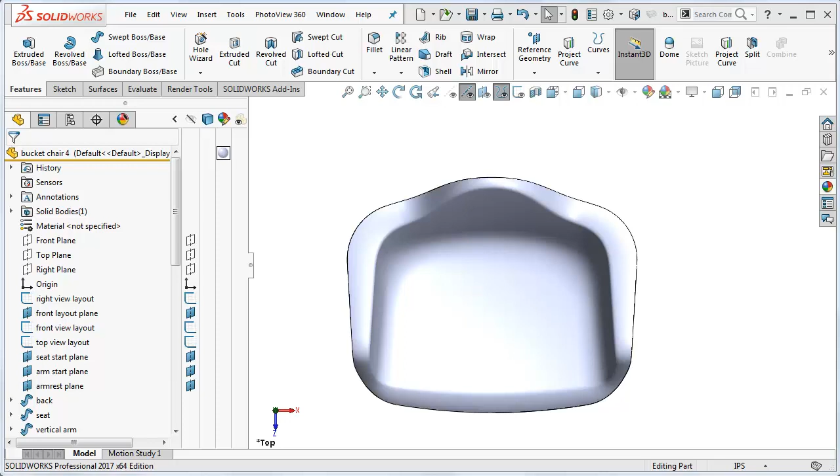This is a relatively quick video to show how to build bucket-style chairs. I've used the Eames Armchair as an example, but this can be used for a variety of similar chairs, such as the Noomi Chair, the Barclay Chair, and the Striad Chair. The techniques shown in this video probably won't work well for something like the egg chair.

These techniques work best for chairs that have well-defined surfaces blended together with fillets or boundaries. For example, although everything is nicely blended together, the seat pan, the arm area, and the back are all distinctive areas that are easily identifiable. This is in contrast to the egg chair, where it's hard to tell where the armrest and the back or the seat begin or end, because they flow together as one single form.

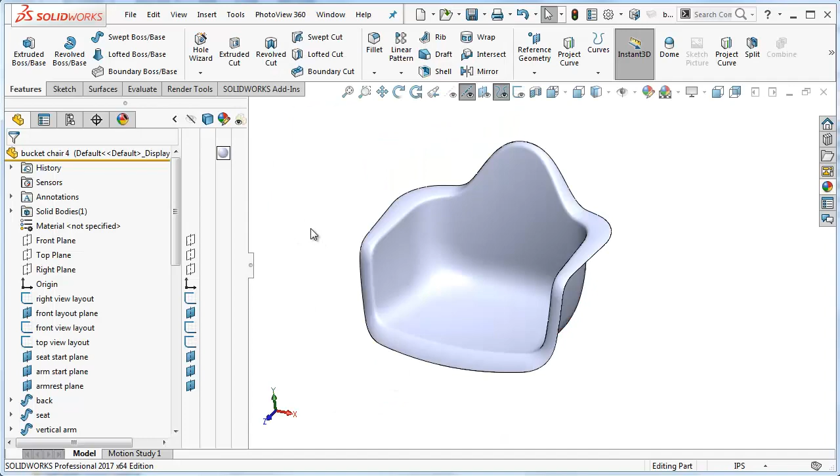All of this becomes even more obvious when I turn on the tangent edges of the chair. We can clearly see the back surface, the seat, and the arms, and the surfaces that blend them together. Considering how curvy this chair is, there really aren't all that many surfaces needed to make this chair model a convincing rendition of the actual chair.

To make this chair model, I had to make several assumptions and also some shortcuts. But before I show you those, I'm going to roll back the model to the raw surfaces before any thickening has been added. Here's the surface model before I mirrored it and thickened the surfaces.

If we look at a side view of the model, we can see that I made the assumption that the armrest is perfectly horizontal, and that the lip running from the headrest all the way down to the area where your legs would go is a non-compound surface. In the headrest area it flows in a Z direction, in the armrest area it is flat planar, and in this vertical area of the armrest it flows in the X direction.

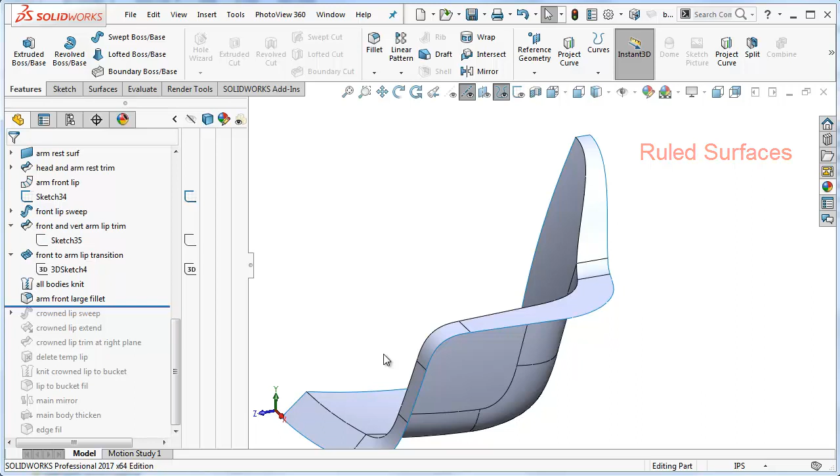These types of surfaces are called ruled surfaces because they can be flattened, unlike a compound surface. The only compound surfaces on this lip area are the very front lip of the chair where your legs are, and this transitional zone from this part of the lip to this part of the lip.

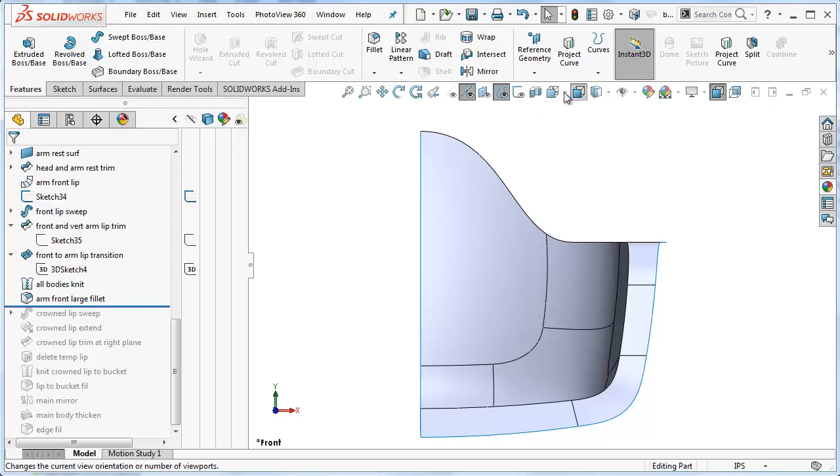If we look at the chair from the front, we see that the lip is edge-on in the headrest area, and if we look at it from the right side, we see that the lip is edge-on in this area. Other assumptions I made were that I could build the back, seat, and arm area separately and then blend them together with a fillet or some sort of boundary surface.

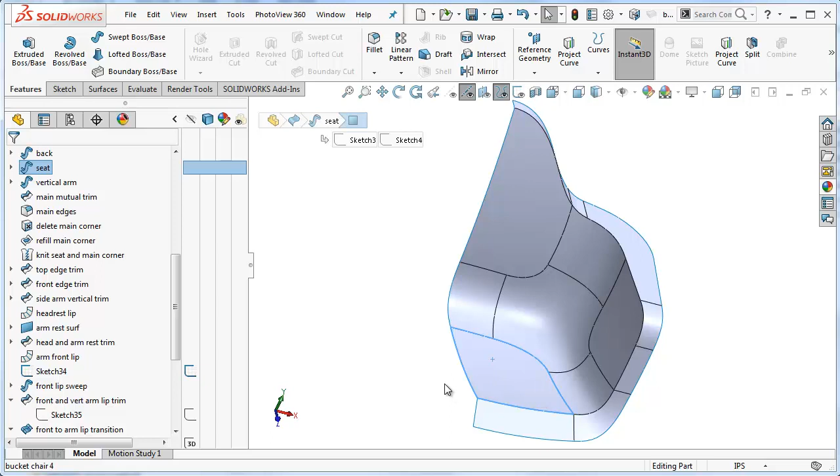I also assumed, for expedience, that these surfaces could be built using sweeps instead of boundaries, which got me around the problem of having to make a lot of projected sketches. This may not be appropriate for your own chair, but it saved me time for the video.

Because of these expedient measures I took, some of the features in the finished chair will not exactly match the layout sketches. However, the layout sketches will still be parametrically controlling the chair.

The last thing to consider is that I made up all of the dimensions you will see in this video. I did not measure an actual chair, nor did I measure one from any photographs. I just eyeballed the photos and made the proportions look somewhat like the real chair.

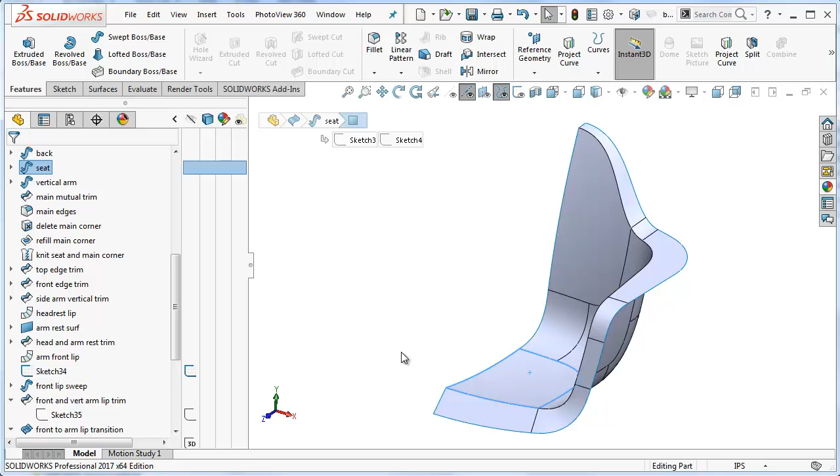Now let me roll back the model to the layout sketches. After modeling several chairs, I've come to the conclusion that the first sketch should always be the side view of the chair, because the shape of the chair back and seat can be clearly seen in this view. That means the side view layout will be somewhat controlling the front view and the top view.

Now, whether you should do the top view next or the front view next is a matter of choice, and you can make good arguments for both.

Whenever I can, I like to pretend that the surfaces meet at sharp corners, such as I've drawn here between the back and the seat area, and that later on some sort of blend will be put in between them. Sometimes what I do is actually draw in a radius to remind myself that there will later on be a blend.

You also can't always know the exact shape of a certain surface or edge when drawn from a particular viewpoint until you've actually got all the surfaces built. So in some cases, some of your sketch will just be a guess.

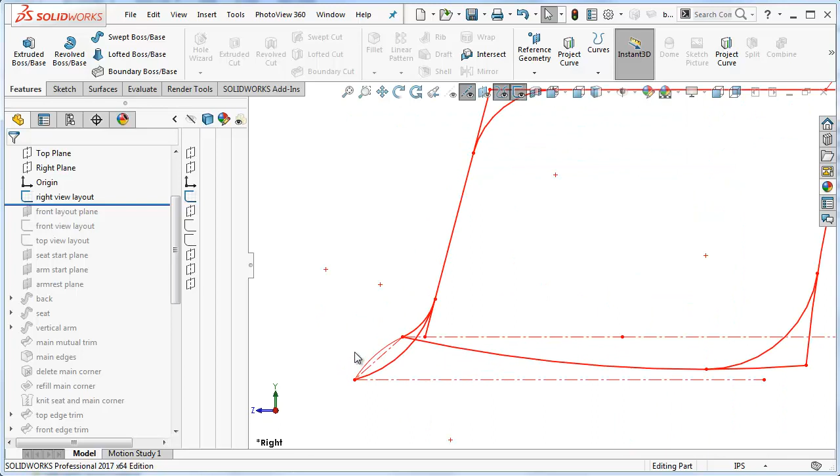For example, down in this area where the front lip is located, I've got a radius going from the vertical arm to the center of the chair, right where the front of the lip is. The shape of this radius is a total guess, as is this radius here as well. This will become more clear when we get all of the surfaces constructed.

These construction lines were added to make it easier to align the later views, such as the top and the front, with this side view.

You also need to know what your lines actually represent. Are they a line that's actually representing a 2D line on a flat plane, or are they a 2D representation of a 3D line? For example, this edge here and this edge here actually represent the shape of the seat and the back on the right plane. These would be two-dimensional in real life. This curve here, coming across here, down, and then finally curving to this point, represents a complicated 3D line seen in 2 dimensions. I wish there was a way to color these lines differently in Solidworks, but I don't know of a way of doing that.

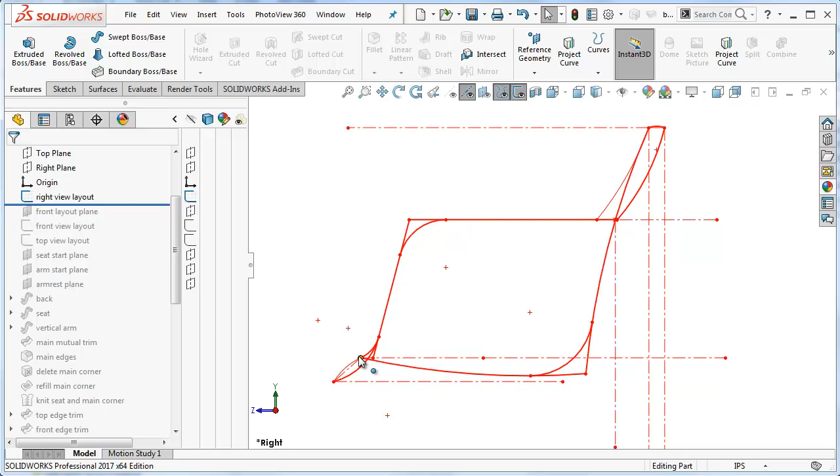The next layout I chose to make was the front layout. And here we can clearly see the shape of the headrest and the flat armrest and the shape of the seat area when viewed from the front.

Another shortcut I took was to make these curves simple 3-point arcs instead of splines, which they probably should be. In fact, the only spline that you see in this view is the shape of the headrest.

This area you see here is the front lip, and once again I've drawn the sides and the bottom of the lip coming to sharp corners and put some fillets in just to remind me that later on this will have to be radiused on this edge.

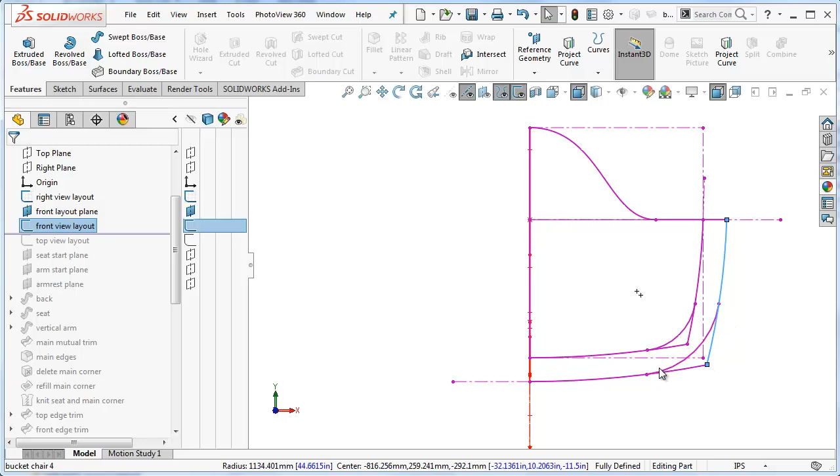The final layout is the top view, and here we see the shape of the armrest from the top, see the front lip from the top, and here's the shape of the headrest from the top.

These curves for the headrest are just a guess, which will become clear later. But the endpoints of the headrest are where they need to be.

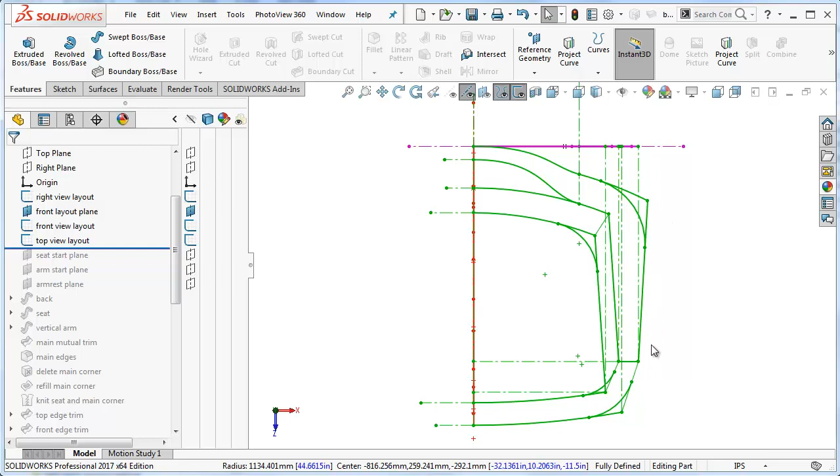This curve here represents the shape of the chair back at the level of the armrest. This edge of the armrest and this edge of the armrest have been drawn as straight lines. I suspect that the real chair has a slight curvature to both of these lines, and if you are building the Eames chair, supposedly you've seen the real one and have noted that.

We can now see how the side view of the headrest aligns with the front view of the headrest.

We can see where the top view of the front lip aligns with this point, and the lower edge of the front lip aligns with this point, and how this curve representing the bottom back edge of the seat aligns with this point.

Finally, we can see how this point in the top view of the headrest aligns with this point in the side view of the headrest.

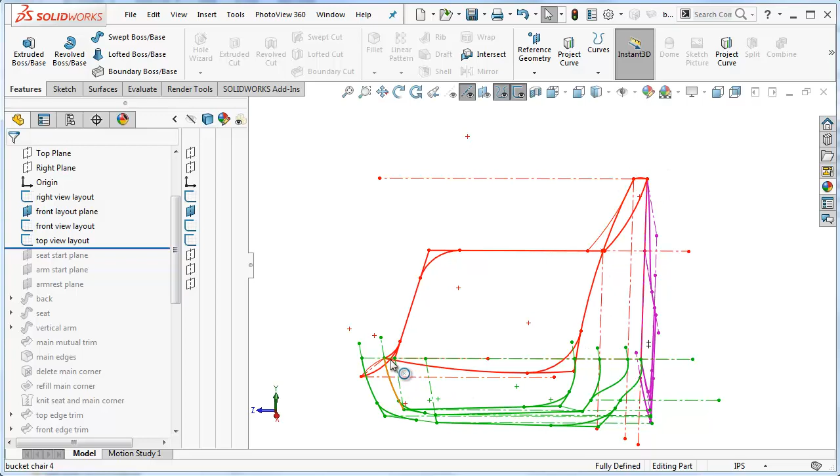We can now move on to making the major surfaces of the chair. For expedience, I will be making the seat back, the seat bottom or seat pan, and the armrest area as swept surfaces. This may not be appropriate for your chair, and it might be better for you to make boundaries with edges that are controlled by projected sketches. But as I've said before, I'm trying to make a simplified version of the chair and simplify it for this video.

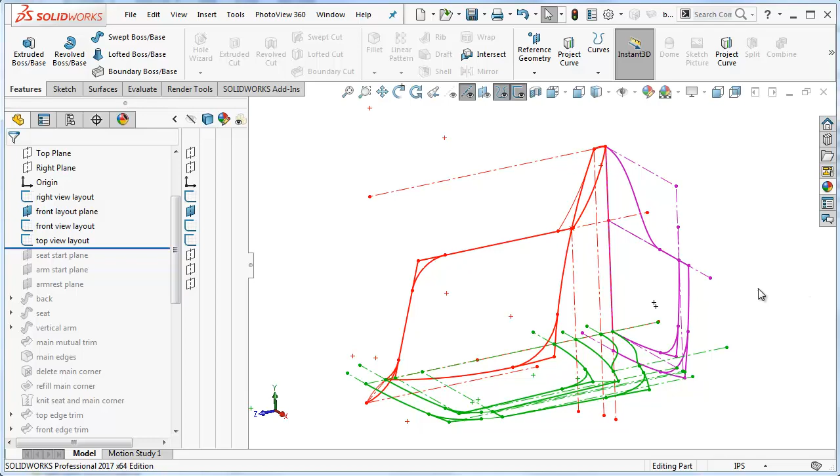To make the swept surfaces, I first need to start with some starting planes. I'll have a plane for where the seat surface will start, and that will be starting right at the end of this point in the side view.

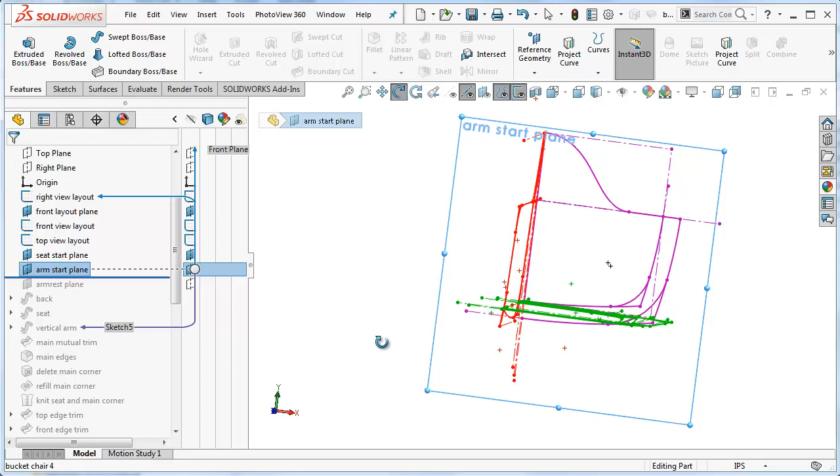I will need a starting plane for the armrest. That will be a plane that's starting at this point here in the side view.

And finally, I need a plane for sweeping the backrest, which is going to start on the top surface of the armrest. So I will start by sweeping the backrest of the chair.

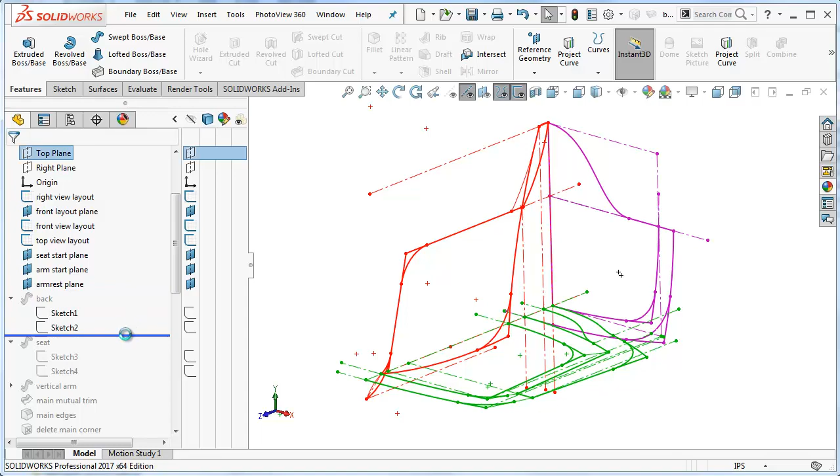So rolling forward, we can see what that sweep looks like. In order to make that, I used a profile copied from the side view sketch, and I purposely stretched that profile a little bit higher and a little bit lower than it originally was in the layout sketch. I did the same thing for

the path sketch, where I copied this line from the top view and I purposely stretched it out an extra 2 inches. The reason for this will become obvious shortly.

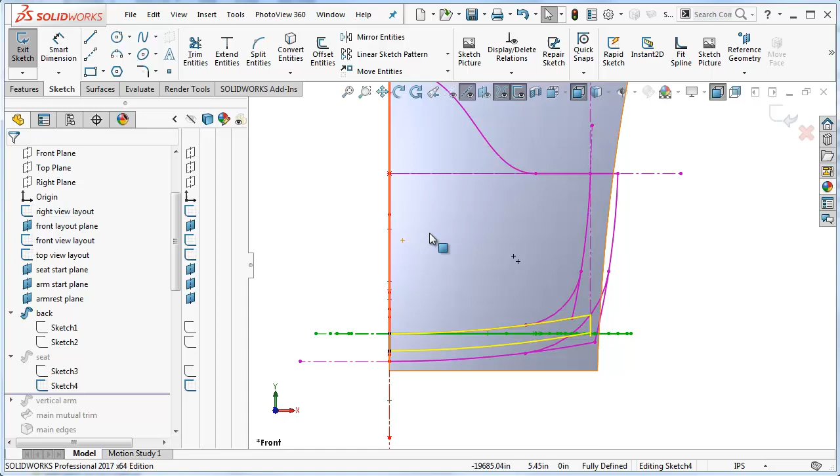The seat surface has a profile copied from the front view, this curve here, which I've stretched out a little bit. The path sketch for that sweep is copied from the side view, and again I've stretched it out a little bit beyond its original limits.

When we turn off the sketches and look at these two swept surfaces, we see that they intersect each other.

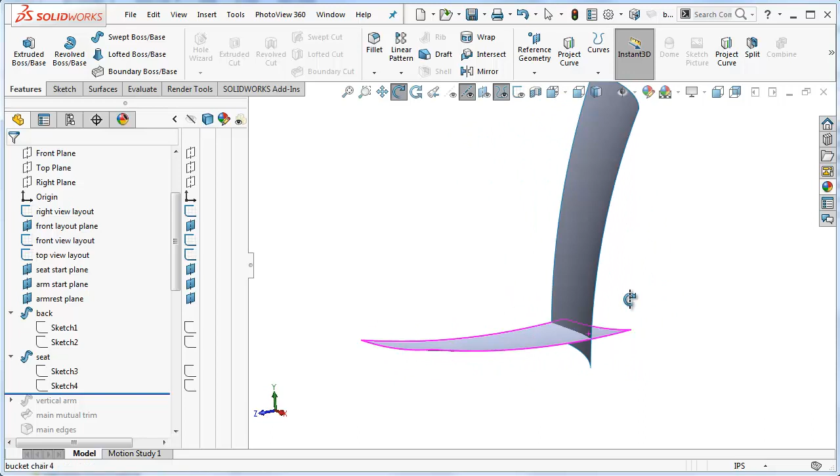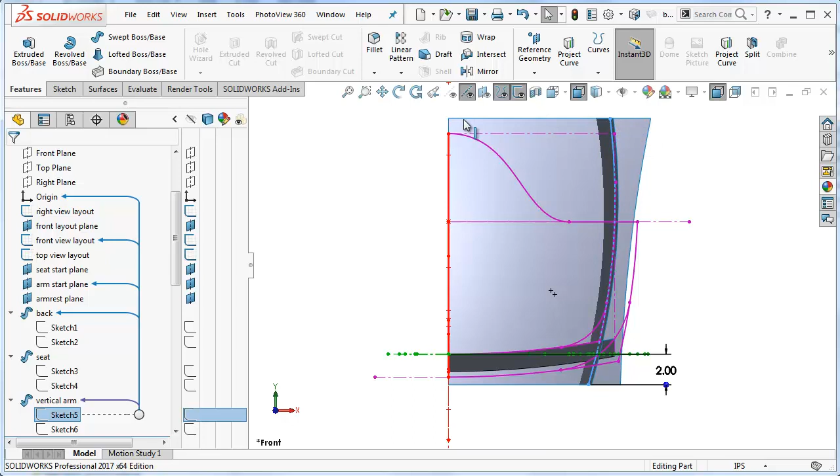Finally, the vertical arm surface utilizes, from the front view, this line here, which has been copied and stretched all the way up so that it matches the top edge of the seat back sweep, and stretched all the way down to meet the bottom edge.

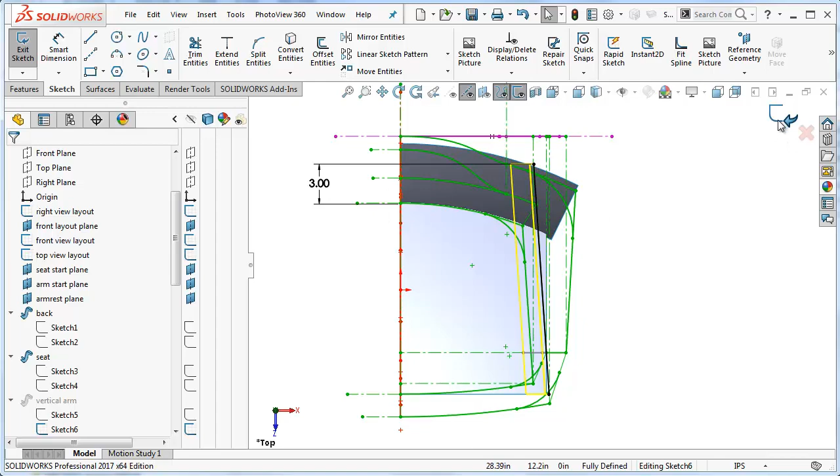The path for this sweep is copied from this inside edge of the arm, and once again it's stretched out longer than it is in the layout sketch. If we look at all of the surfaces now, we see that they intersect each other nicely.

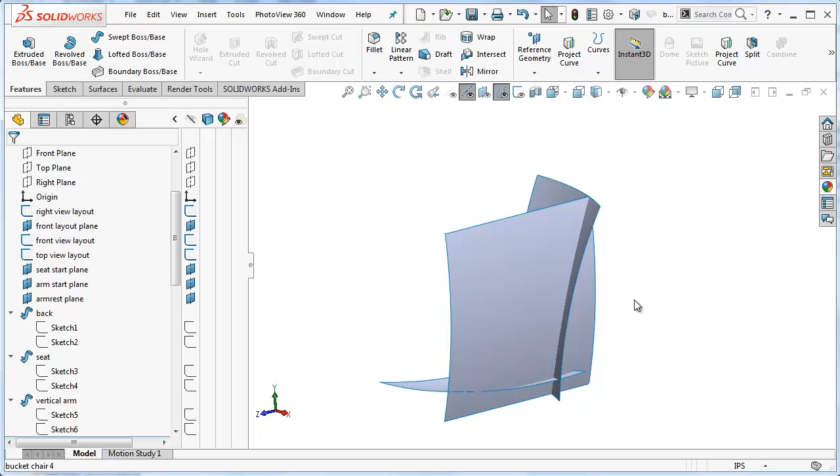They line up at the top and at the bottom. This becomes necessary when you want to trim these using a mutual trim, because otherwise the trim sometimes gives results that are undesirable. So we're going to trim these three surfaces together, and I'll demonstrate using the mutual trim.

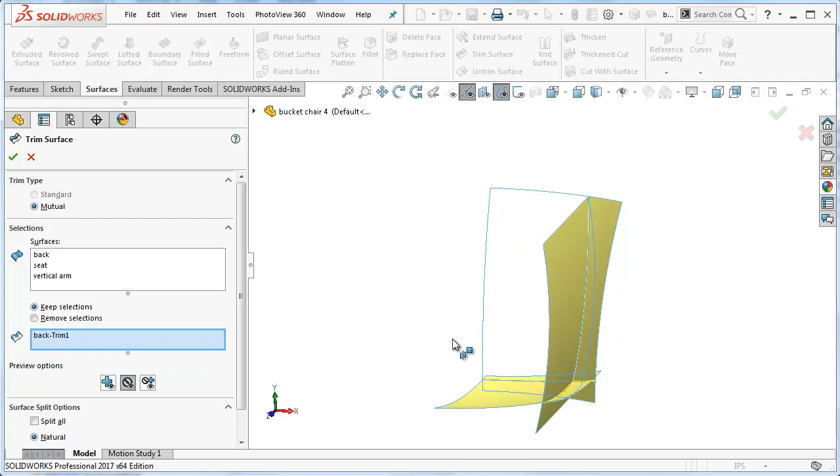Go to Trim Surface, select the mutual option, and select all three surfaces. I'm going to use the Keep Selections option, highlight the Pieces to Keep box, and use the Show Excluded Surfaces option, so when I select a piece I want to keep, it actually disappears, leaving behind the bits I don't want.

Click the check mark. This is going to be my basic form that forms the bucket chair. I now need to put in some blending surfaces between these main surfaces so we no longer have any sharp edges. One way to do that is to trim out the sharp edge and build in boundaries to blend all of these main surfaces together.

It's going to be a little bit of work. It might be the right way to do things, but for the purposes of this video, I'm going to see if I can use an easier method, which is to use a fillet.

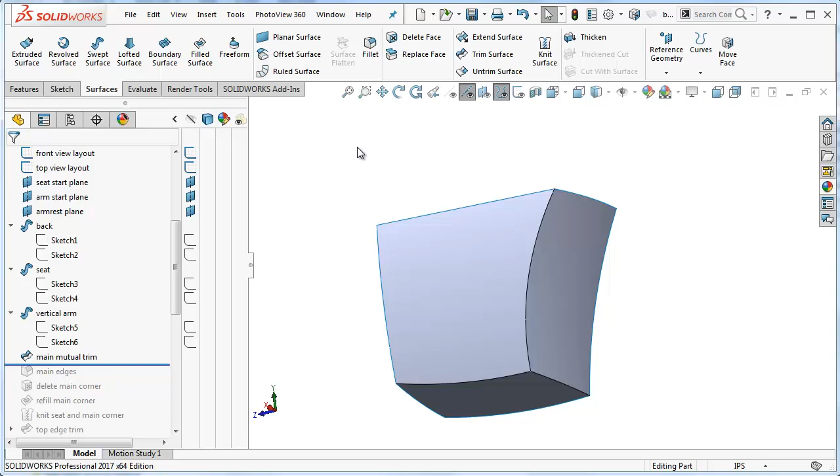So rolling forward here, we'll take a look at that fillet that I made, and we'll edit that feature. We see that I've used a multi-radius fillet, which allows me to have a different radius on all three edges.

Also, what I do not want to have happen is have these fillets run into each other with sharp corners, because then this won't have a nice, soft, organic look in the corner. What I've done is use the setback option to get these fillets to blend together in this zone more nicely with a curve between the tangent edges. I've also used the curvature continuous option.

Now if we go back to the setback parameters, we see that I've set the setback on all three edges emanating from this vertex to 2 inches. That means if this fillet and this fillet were originally going to blend together here, the blend point actually gets set back by 2 inches in both directions, giving this curved line, and the same happens in all three places. I can actually have a different setback in all three areas.

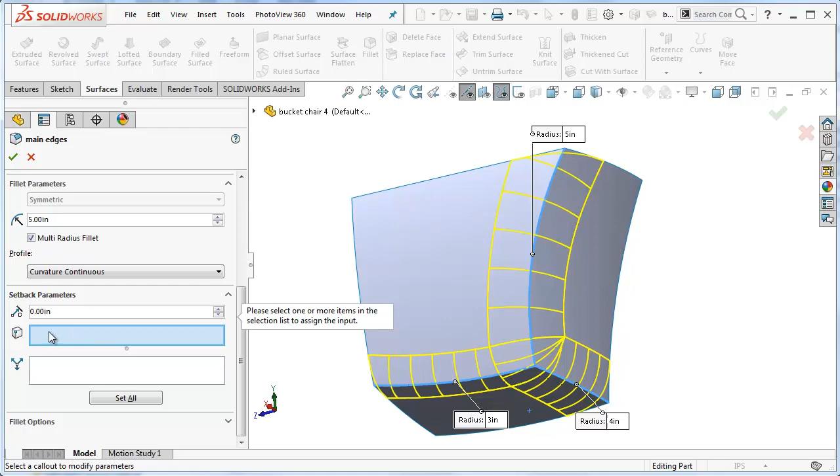If I want to eliminate the setback, which I'll do here, you can see these blend together with hard corners. This would still be a nice blend, but it isn't quite right for an organic looking chair like this. So we'll leave the setback option turned on, and I'll cancel out of this feature. Now we can see how these fillets blend together with this sort of hexagonal zone, giving us a nice organic, soap bar like corner.

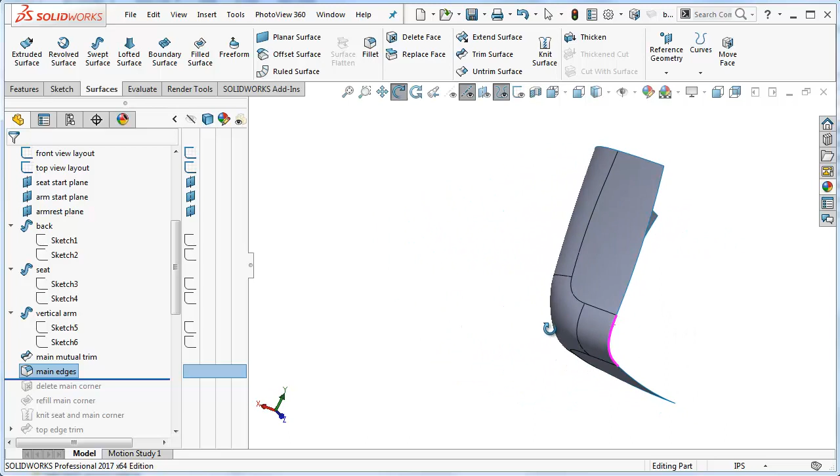However, if I roll my views around, I see that this corner isn't very nice looking. It's kind of flattened out in some areas.

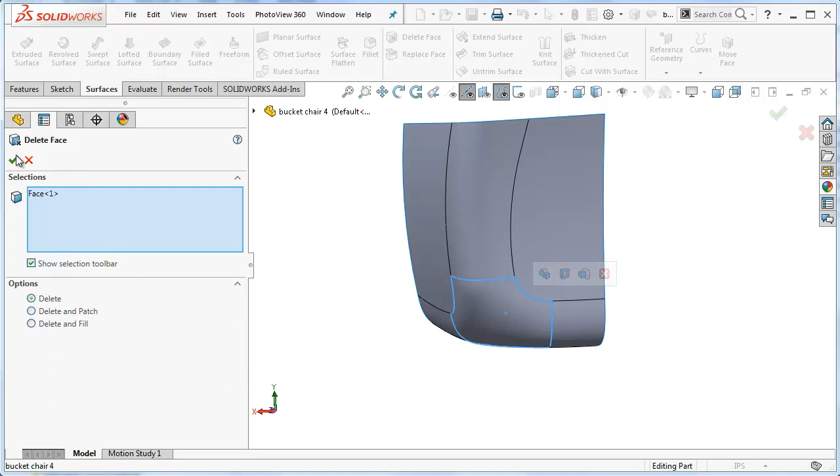What I'm going to do is delete this face and build a new fill surface in this area. I do that by going to my Surfaces tab, Delete Face, and use the Delete option, simply clicking on that face to eliminate it. Now I build in a new filled surface, clicking on the 6 edges of this patch boundary.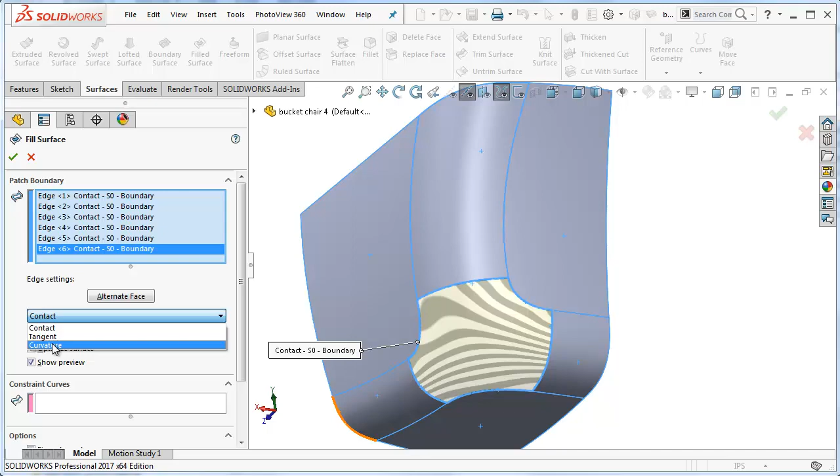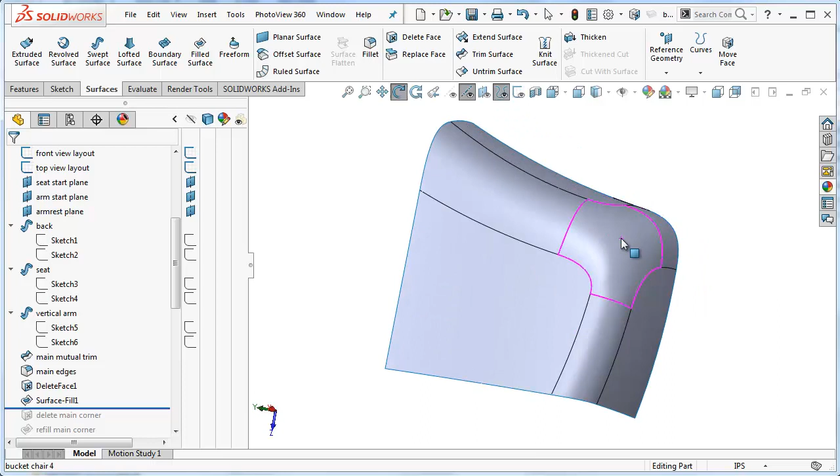What I want to do is make all the edges have equal curvature, then click out of that option. We see that this is puffed out a little bit more nicely compared to the original corner. If we want this to puff out more, we can add a constraint curve on a plane going through here, or maybe through here, or even add a 3D point sitting out here somewhere that will pull this surface out a little bit more.

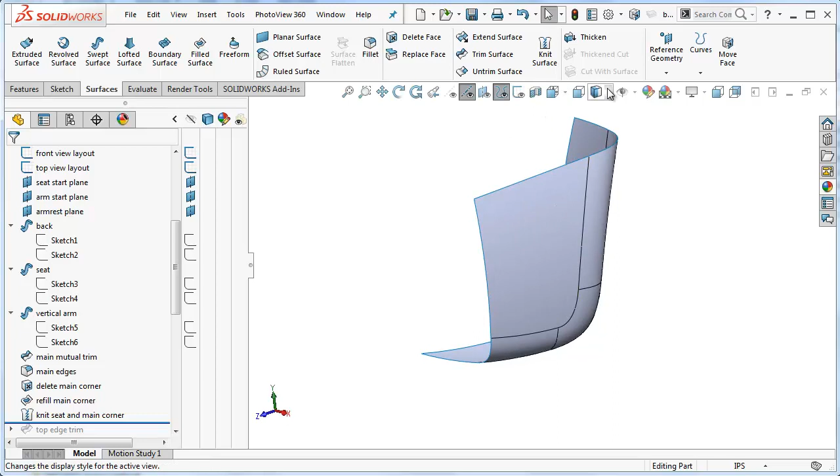The next step is just to reknit this back into the main body. Now we have a nice organic looking bucket shape that can be trimmed to give us the final shape of our chair. Let's just look at that without the tangent edges turned on. You can still see it's a little bit flattish in this area, so as I said before, a constraint curve might help out there.

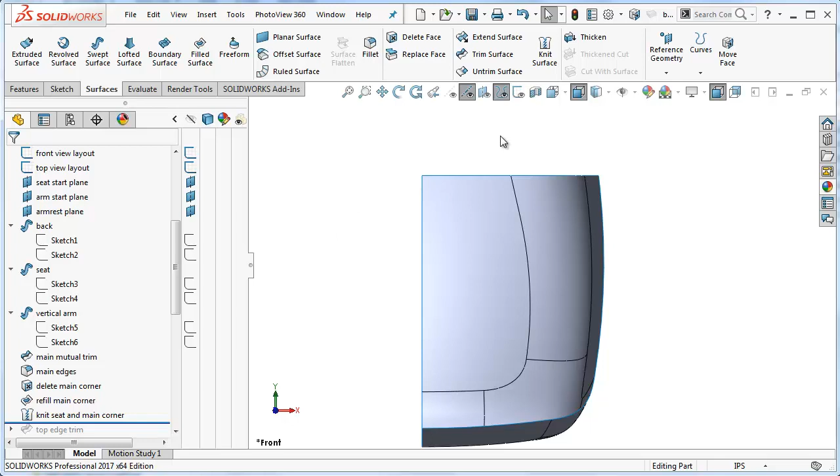So the first trim I'm going to do is to trim out the shape of the headrest and the top of the armrest. Whenever you're doing a trim on a surface, you want to use the layout sketch that is looking the most directly at the particular feature you're trying to create. What I mean by that is if we want to have a nice accurate shape of the headrest, we should be trimming it from a direction where we have a very direct view of the headrest. That would actually be the front view.

So by copying this curve and this straight line and using it to trim away this surface, we get something that looks like that. Looking at the top view now, I want to create this curve on the front edge of the chair. And since this curve is most directly seen from the top, that's the view I want to use to make this trim.

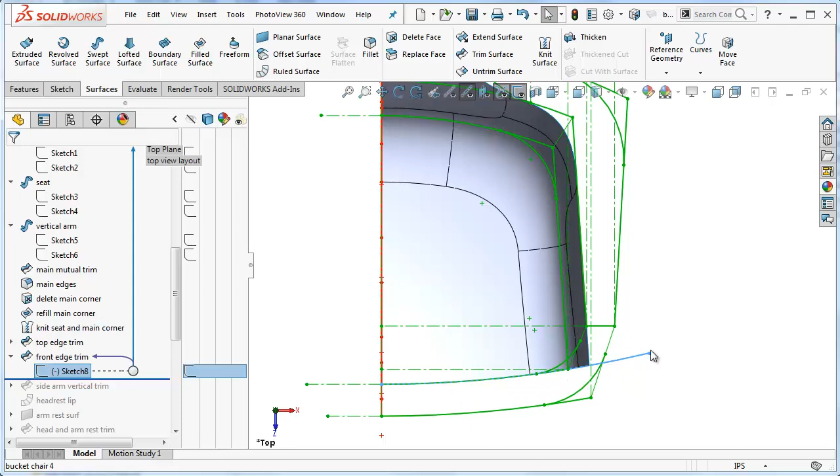That was done by copying this edge and stretching it out a little farther to completely trim this all the way out to the outside.

The last trim I need to do is the one that angles the armrest back a little bit. Again, the most direct view of that in this case is going to be the side view. So we are trying to get this tilted back edge, and we need to blend it in to this edge here, which is the front curve. Now you can start seeing how some of these curves were just guesses, because this edge here obviously is not really matching this edge very well.

To do this trim, I'm going to copy this edge, but from here to here, I'm going to build in a little spline that's going to blend them together nicely. So let's take a look at what that looks like.

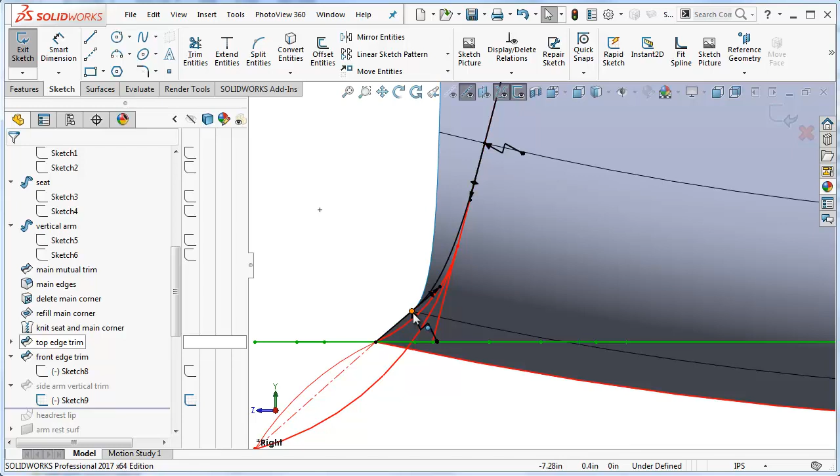So here's my copied straight edge. Here's a 2-point spline added from this point to this point here. And I made a copy of this edge here because I was having trouble making this spline tangent to this edge, and sometimes it's easier to make it tangent to a copied line in the sketch. So I copied this line from this lower edge, copied this line from my right layout, and then drew in a spline which is equal curvature at both ends.

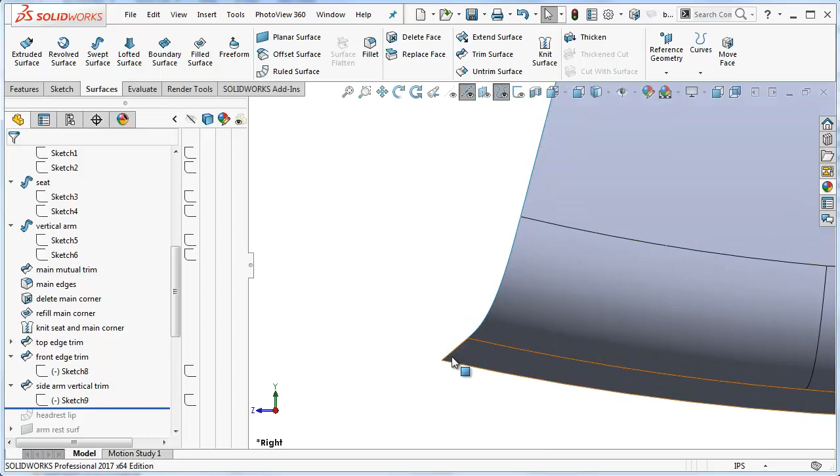So there's my trim. You can see this is a nice smooth looking curve through here, and we'll take a look at that now from the top view. We can see that this is a pretty nice looking continuous curve going from the arm to the seat area.

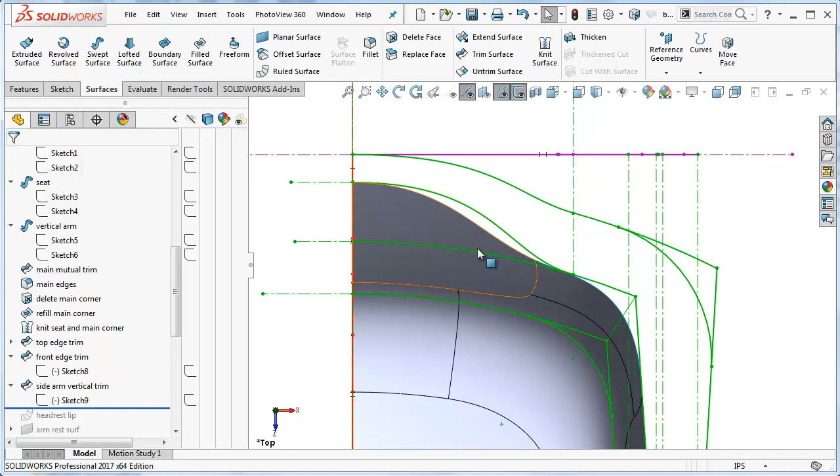If we look at our entire chair and turn our sketches back on, now we can see how some of my curves don't really match up with the layouts. Like this edge of the headrest does align right at about this point here, but you can see it diverges quite a bit in this area. This upper edge does align. This edge here does not align in this area, but it does align in this area.

This is because I wasn't building any of these edges as projected sketches from two different views, but instead was using a sketch from one view to trim an already created surface. As a result, we just get an edge shape from the top view here, which is different from the shape that we guessed originally.

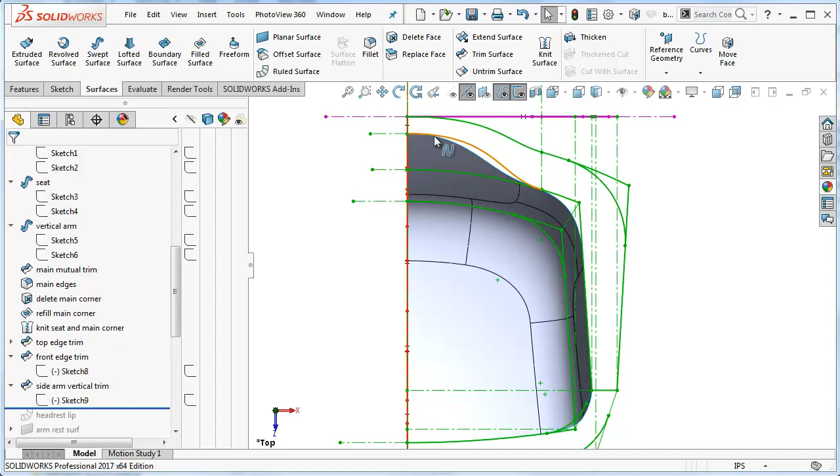The same mismatch can be seen from the side view. This aligns right here, but this trim that we just made does not align at all with this sketch that we made a guess on. But it does align right at this point here.

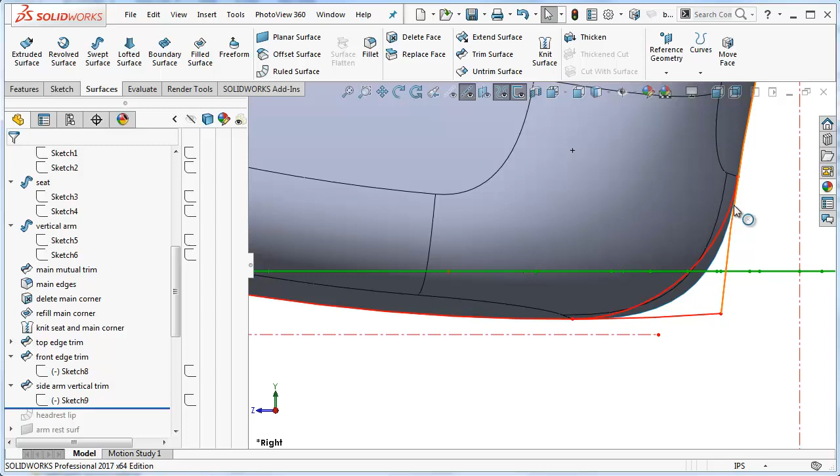Similarly, we see that this bottom edge aligns here, but it diverges in this area because I drew this curve in just to remind me that later on I was going to blend this together. And finally, if we look at the top, we see that this edge of the headrest doesn't really match up with this curve that I drew from the side view, which again was just a guess.

If you're planning on making something like a Barclay chair that has a big opening between the seat and back, this would be a good time to make the trim that forms that opening. After you make that trim, you might want to delete any leftover little pieces of surfaces, and if necessary, take the seat pan area and extend it out a little farther.

Then retrim it to the shape you want. The next major surface we need to build is that lip surface that starts at the headrest, goes down along the armrest, and finishes at the front edge of the seat. We're going to have to do this in stages.

The headrest area could be made by taking a straight line on the right plane and sweeping it down along these two edges using the keep normal constant option. However, I found that when I tried to do that sweep, for some reason it was failing whenever it got to this point here. So a workaround was to use something called a ruled surface, using a sweep option for that. I'll show you what that looks like.

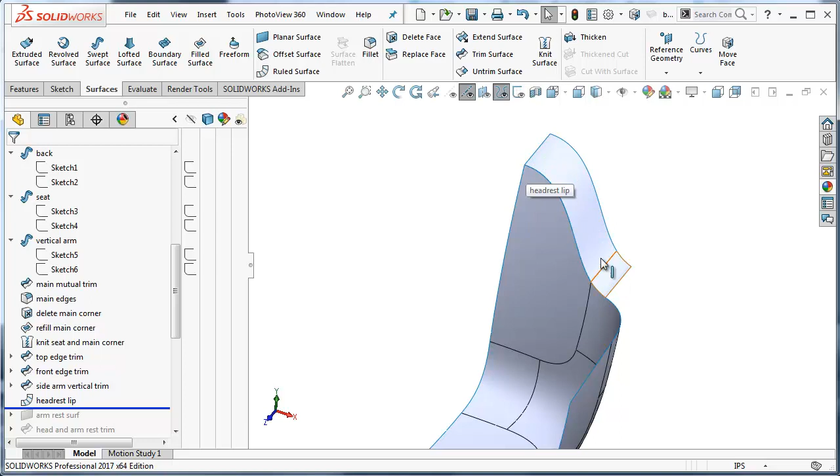This has effectively taken a straight line and swept it along these edges that I selected, and it has made the sweep go perpendicular to the plane that I selected.

So we'll take a look at the feature manager for that. What I've done is selected the front plane, used the sweep option, and this makes a swept surface where the entire surface is perpendicular to the selected front plane, sweeping along these two edges I've selected. I've also specified how long this edge is going to be, and I arbitrarily chose 4 inches, which is long enough to give me something to trim back later on.

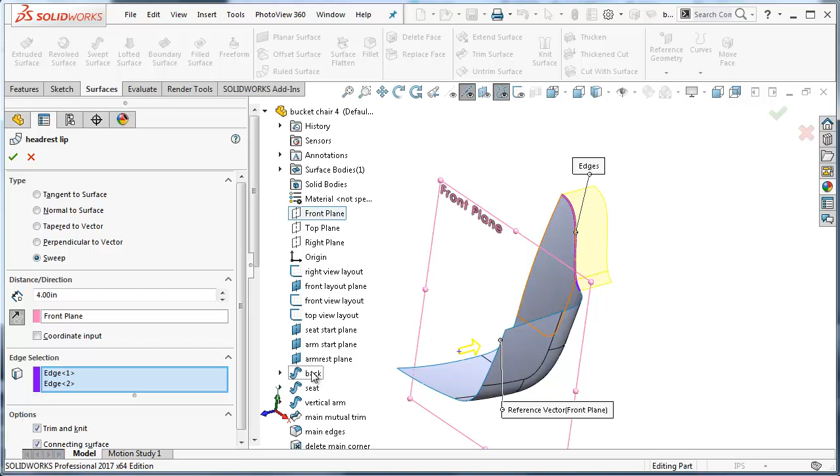The armrest surface is just a planar surface sitting on the plane that I had already established right here. If we look at this from the top view, I've purposely overbuilt this surface so that later on I can trim it to the shape that I want.

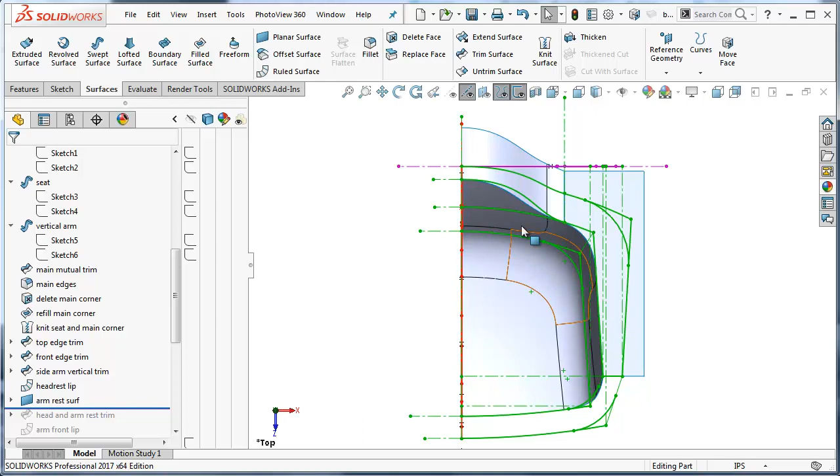I'll go ahead and trim these two surfaces using my top view sketch, but you notice that because this line is so far off of the real line, I'm going to redraw this back edge to look a little more in harmony with this front edge.

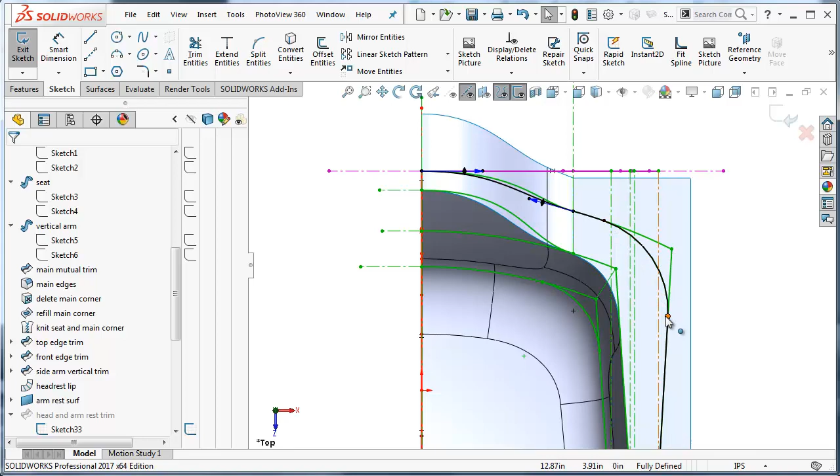If we go back and take a look at what that sketch looks like, I've drawn a new spline going from this point to this point, which pulls this edge forward a little to look nicer with this edge. This portion is copied from the top. This arc is copied from the top layout, as well as this straight line, giving us the headrest and armrest area a completed look. I now have 3 more zones where I need to add the lip.

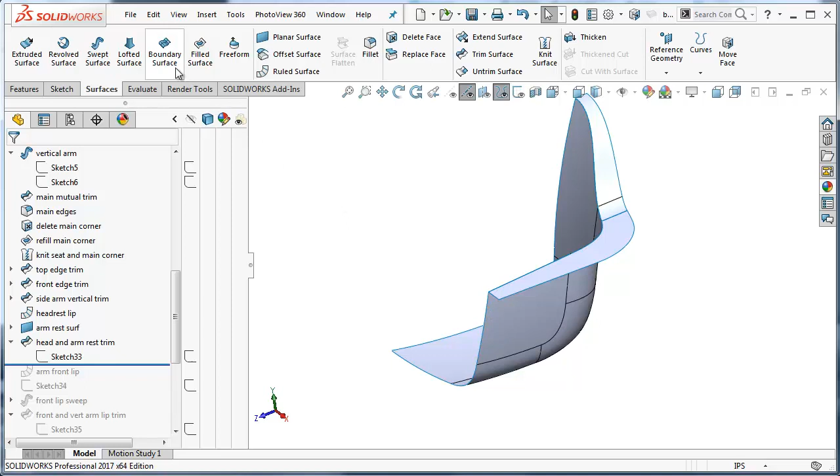This descending portion here of the armrest, this curving portion, and then the bottom front edge of the seat area. I'll start with this edge here because that's an easy one to do, using the ruled surface option again. So we'll go to ruled surface, sweep option, and then choose the plane that this surface is going to be perpendicular to. In this case, I want it perpendicular to the right plane, and I'll select the edge that's going to be swept, adding an arbitrary dimension here.

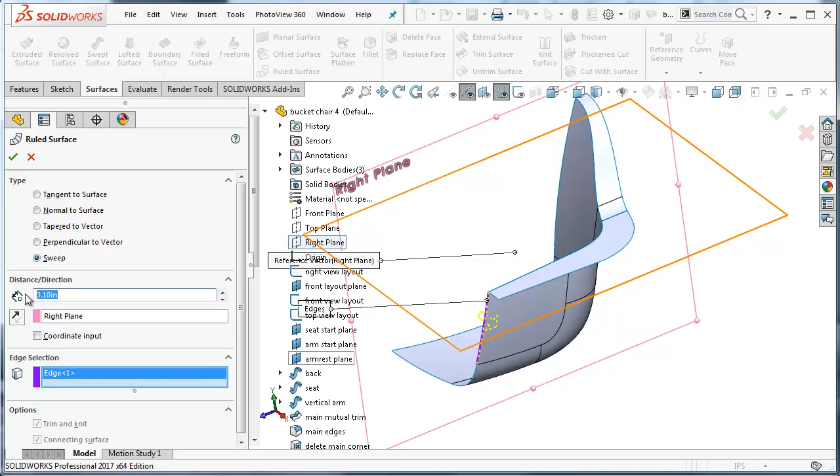The nice thing about this option is that I don't have to draw any extra sketches on any new planes to create this surface. And you see that when I look at this from the right side, that surface is edge on because it was made perpendicular to the right plane.

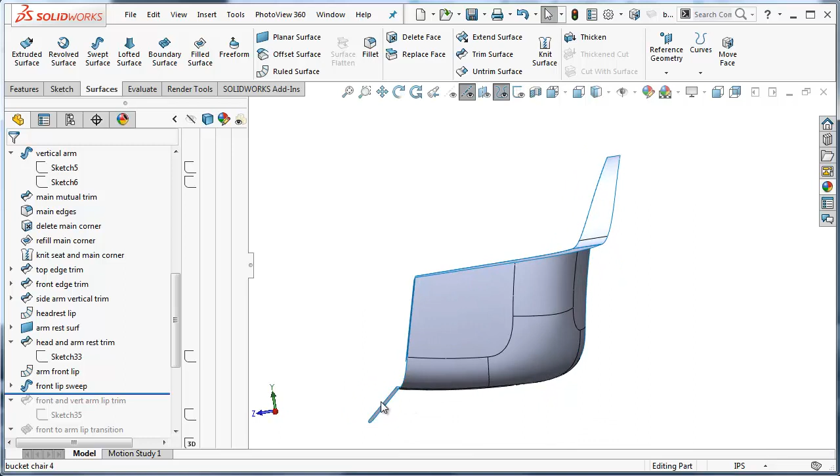The front lip of our chair angles outward quite a bit and is probably going to be a compound surface, so it's not going to be suitable to make a ruled surface here. So what I've done is copy this line from the right layout and swept it along this edge. I've purposely stretched it out a little beyond the original layout so that when I trim this, I will get a nice clean trim.

So now looking at this from the front view, I want to trim back both of these surfaces to their final shape and then patch in a transitional surface that will go from here to here. So the trimming sketch is going to come from my front layout.

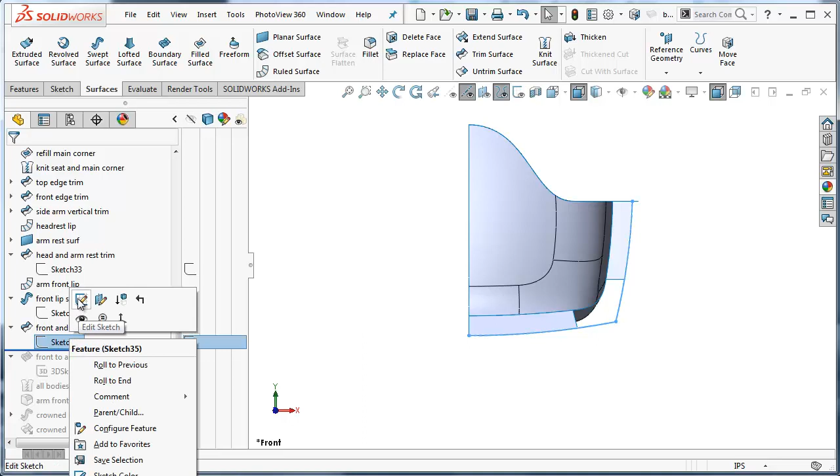These two curves just meet at a sharp corner, so I trimmed those, saving this piece and this piece. Now what I can do is build that transitional zone, which will actually be a boundary going from this edge to this edge, using this edge, and then we want one last edge out here to control the outer edge of this boundary.

To do that, I've drawn a 3D sketch going from this point to this point, and it's equal curvature at both of these edges. Let's take a look at that. This is the final boundary surface, and we'll take a look at that spline I drew in 3D, going from this point to this point, equal curvature to this edge and to this edge.

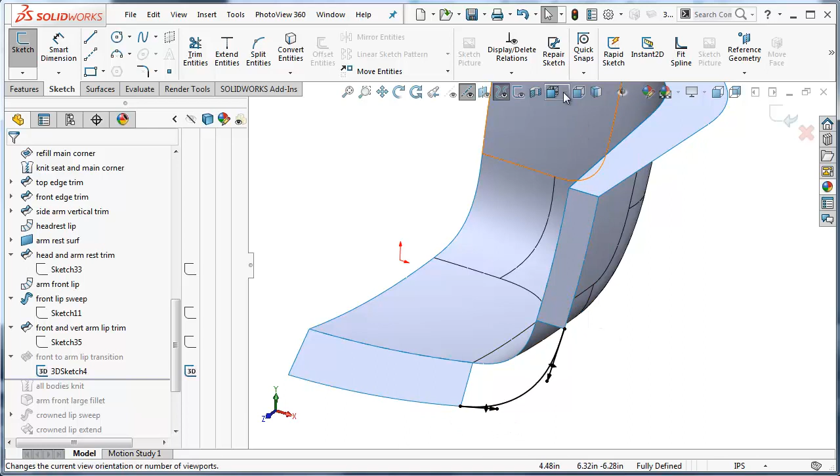When we look at this from the front view, we can see this is a nice looking curve, and if we look at it from the side view, it's a fairly nice looking curve also. We can further see that this curve doesn't really match anything that I drew in my layouts.

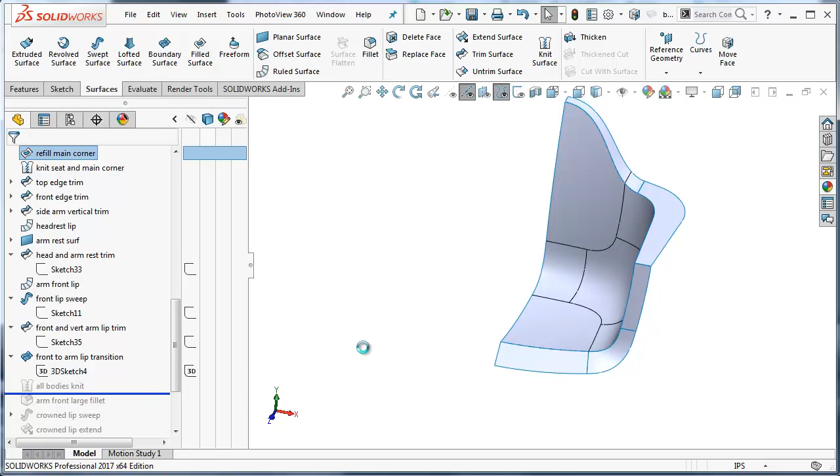Now we have all of the main pieces of our chair. I'll knit these together to form one body. Now I've got one more task to do, which is simply to add a fillet to this edge, and this is equal curvature on both ends of the fillet.

Some chairs really do have a lip that's very flat like this as it goes around. Others have a lip which has a crown to the surface, giving it a more compound curvature shape. The lip of the Eames chair does have a crowned surface, but that doesn't mean the work we've done here is for naught, because we'll be able to use this inside edge of the lip and this outside edge of the lip as guides to create our new crown surface running from the top down to the bottom.

You might think the best way to do this is a big boundary with lots of cross-sectional sketches all along the way, but an easier way might be to use a sweep. I'm going to go through the actual steps for making this crowned surface.

One problem with making a sweep along this area is that the width of the sweep profile would have to get wider and then narrower again as it runs along the length. Normally the profile remains constant in size, but there is an option in sweeps that allows a varying profile, and I'm going to go through that process.

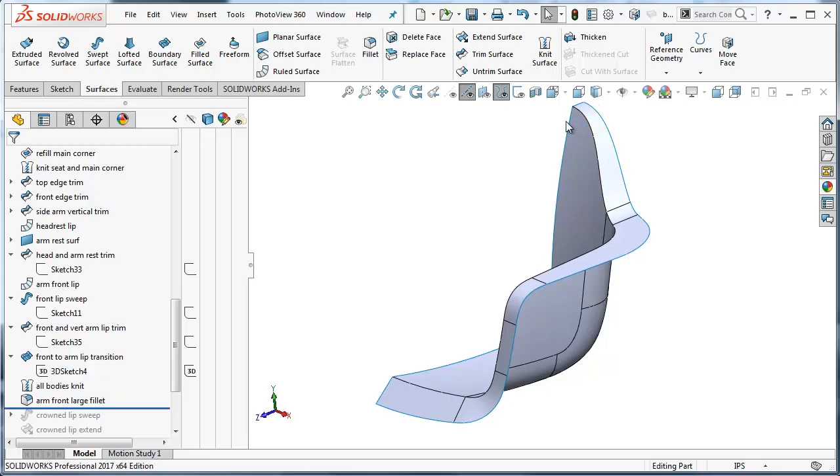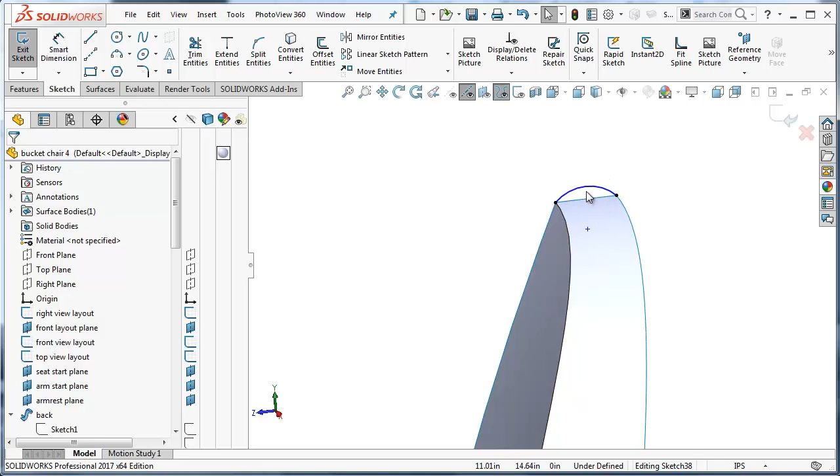We're going to draw the profile on the right plane and start it up at the top of the headrest. So on my right plane, I'll make a new sketch, and the crowned profile is going to be very simple. It's going to be just a 3-point arc, and instead of adding a radius to this, I'm going to add a height dimension to control it.

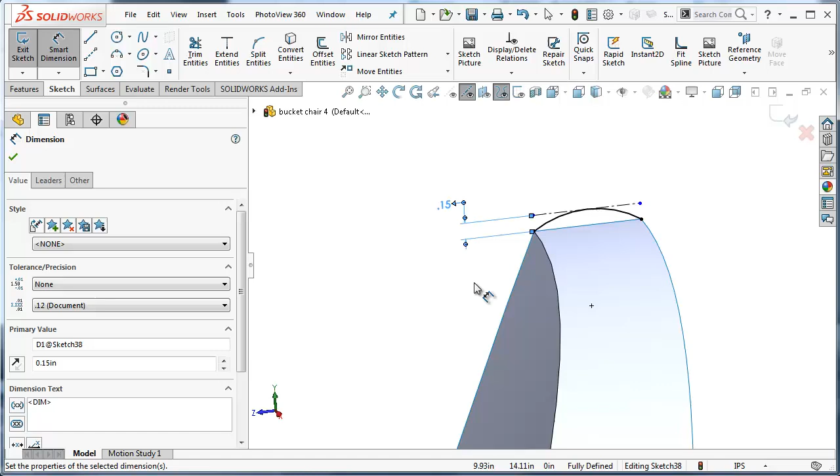I'll make a tangent line here and give this a dimension, in this case, of about 0.15 inches. What's going to happen is we're going to sweep this profile along 2 rails, this edge here and this edge here, and no matter how wide or narrow this profile gets, it's always going to be 0.15 inches tall.

That way, as it gets wider, it won't get taller, or narrower, it won't get shorter, which is what would happen if we took this dimension out and added a radius instead. So we've got this profile. We'll finish that sketch, and now I'm going to do the sweep by selecting this profile.

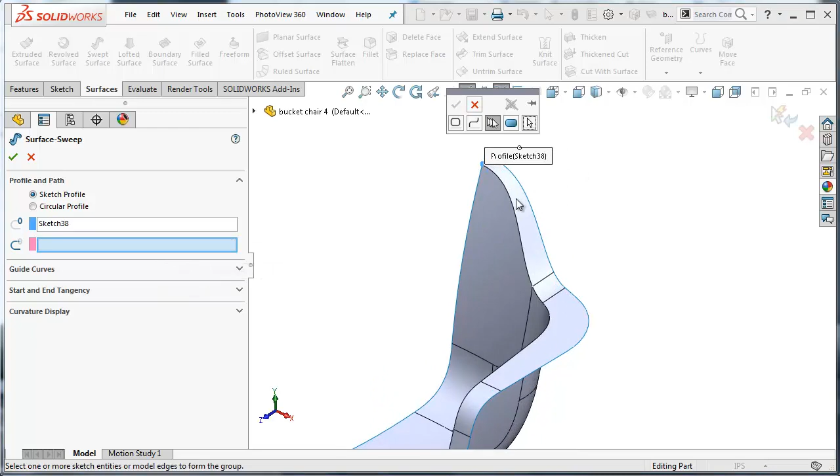I'll turn off my sketches so I can see my edges, and I'm going to use this inside edge as my path. I have to piece it together out of several edges, so I'll use the selection manager and choose all of these pieces of the edges. You might have a very fractured edge, so make sure you get every last little piece in there, or the sweep will not work.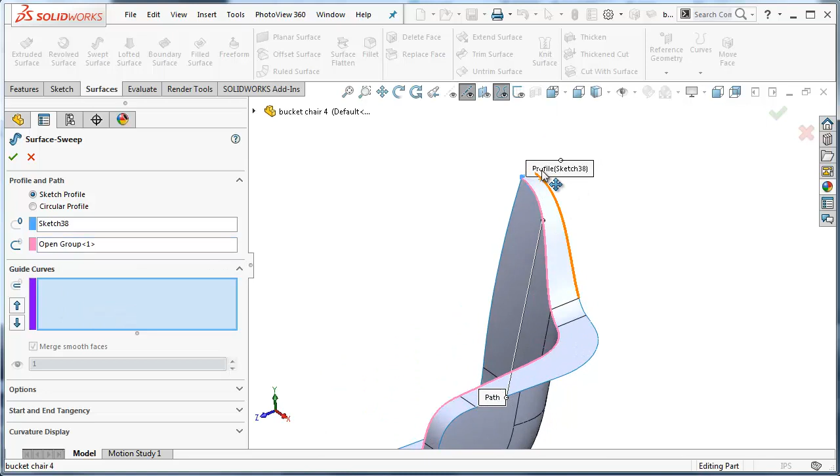So clicking on the check mark, I see that I'm not even getting a sweep just yet. Then I'm going to open up my guide curves box, and I'm going to use this outer edge of the lip as the guide curve. So once again, I want to use the selection manager and make sure I get all of the little portions here.

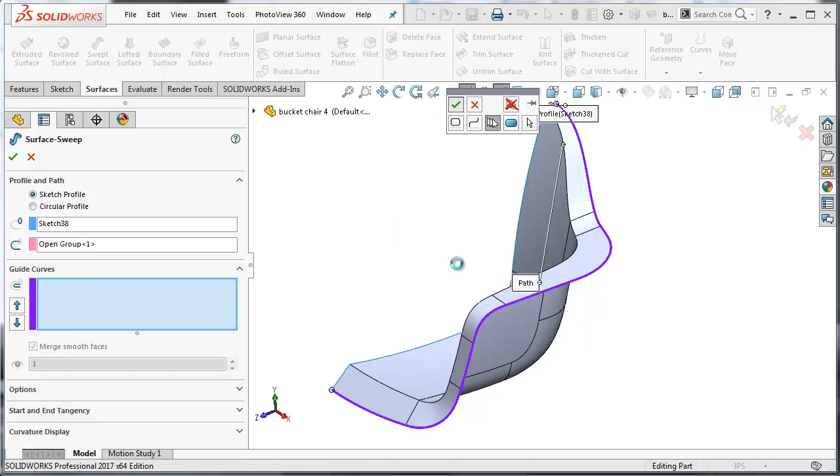This takes a moment to figure out what it's doing, and we see that the sweep is only going to here, not making it all the way down to here. All we have to do is, under our options, under Profile Twist, select Follow Path and First Guide Curve. This is a complicated sweep, so it'll take a moment to figure out.

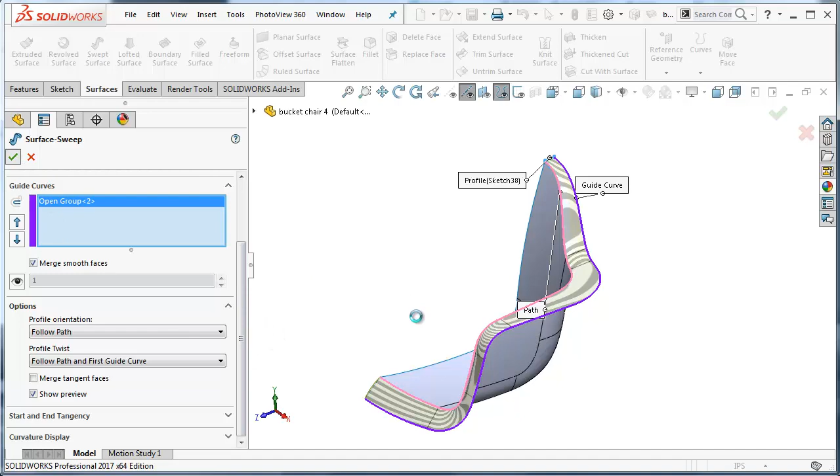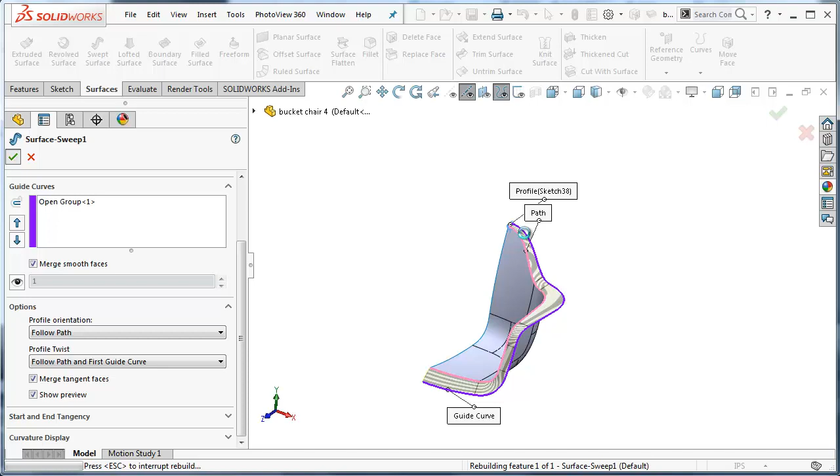And you can see that it's always the same height everywhere, 0.15 inches high. I'll also mention one other option that should be checked, although I don't think I did. Just for good measure, go ahead and check the option Merge Tangent Faces. It doesn't seem to make a difference in this case, but by doing so you'll avoid having this surface broken up into lots of different pieces.

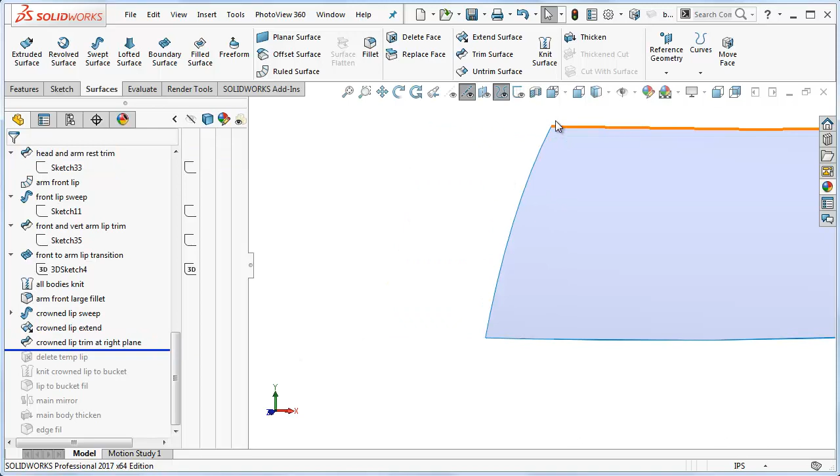Now we are pretty much coming into the home stretch. I did discover when I looked at this sweep more carefully that it did not quite make it all the way to the right plane down at the bottom here. So I'm purposely going to extend this edge and then use the right plane to trim it back again. If we look at this from the front view, we see this is now a nice straight edge that ends exactly on the right plane. If we don't do that, we'll have a funny crack when we mirror this over.

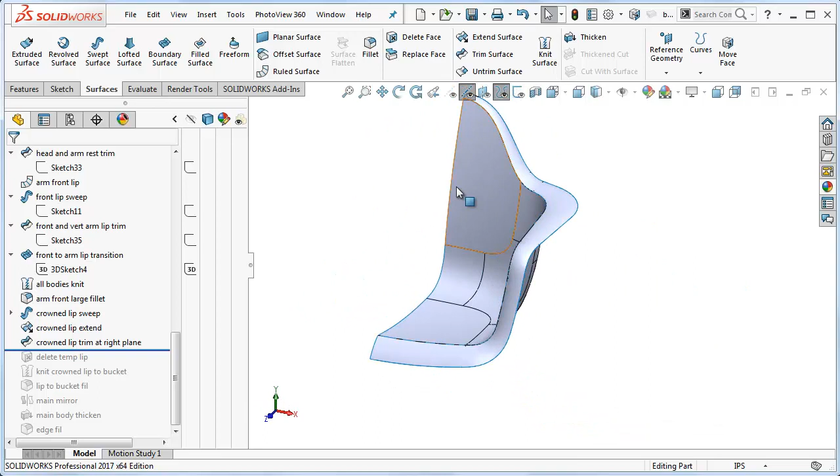The last thing we need to do before mirroring and thickening it is getting rid of this original lip surface that was used to help create our swept surface. All we have to do is use the delete face command. You want to probably hide your swept surface when you do this. So we use the delete option, not delete and patch or delete and fill, and just click on all of these surfaces to get rid of them. Make the swept surface visible again, and then knit everything together.

The last little bit to do is just add a fillet along this edge to blend everything together. I use the chord width option so that this looks like a consistent width going all the way from top to bottom. The one little problem is that if you look at the real chair, it looks to me like the fillet gets very large down in this area for a nice big blend while staying more of a tight radius up here. So it might be more appropriate to use a variable radius along the entire edge, allowing it to get bigger here. Or you could use the chord width fillet, but then come back and trim out these areas around the corner into here, and then build a new boundary surface that gives you a much softer blend.

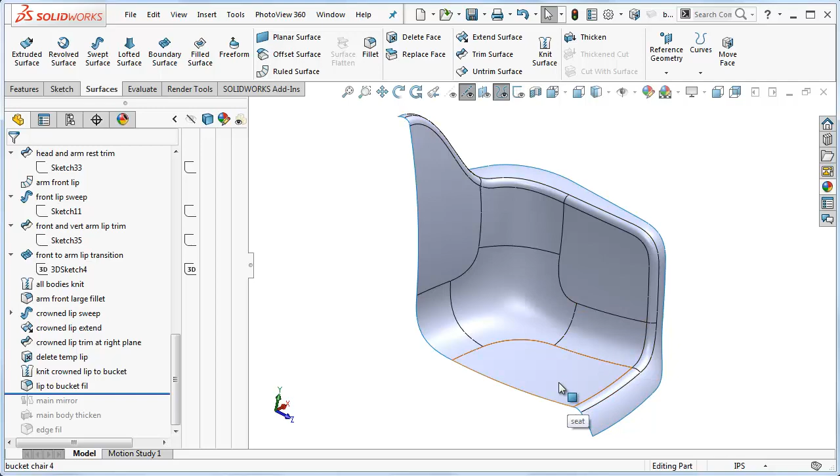Now I mirror the chair, and you need to decide when you draw your sketches whether your sketches represent the top surface of the chair or the bottom surface of the chair. I decided those surfaces represented the upper surface of the chair, so I'm going to thicken it going downward.

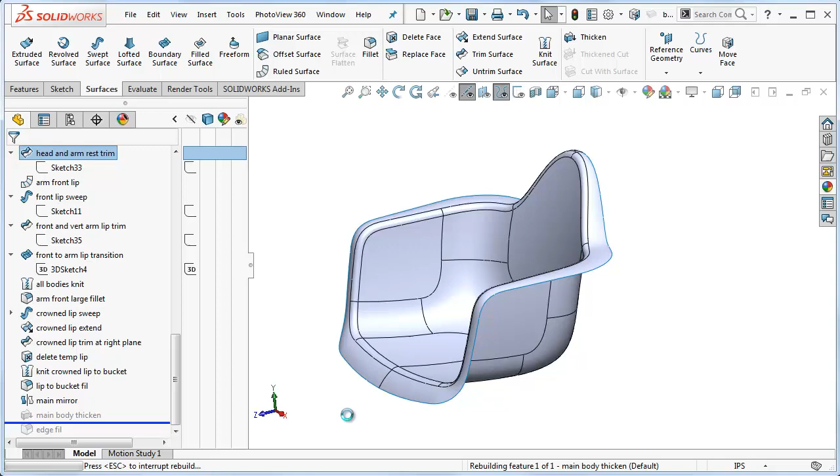There's my thickened chair. I don't know what the true thickness is of this on the real chair, but I used 0.15 inches to thicken it. Seemed like a pretty good guess.

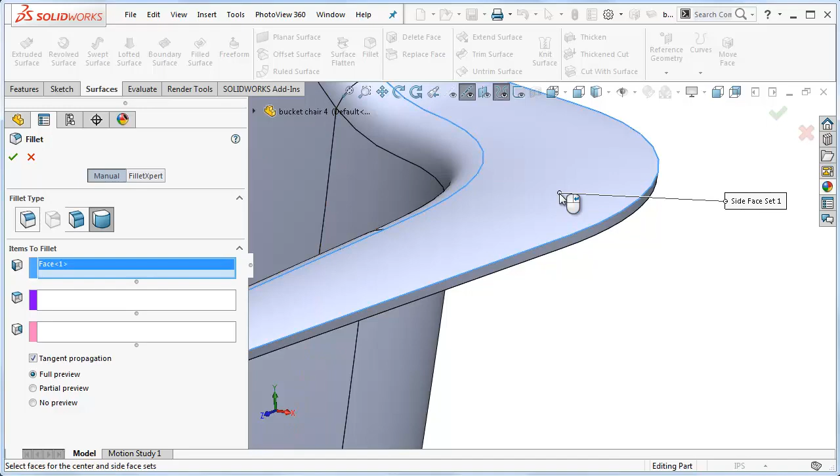And then finally, I want to get rid of this sharp edge. If you can, try to use a full round fillet. I'll show you what that looks like. That's this option right here. So in the first box we put the upper surface, the second box we put the edge surface, and the third box we put the bottom surface.

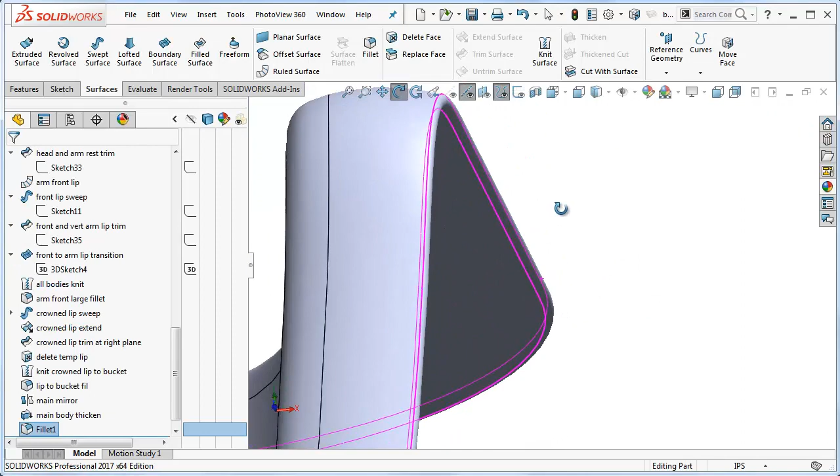With tangent propagation, it should propagate the fillet all along the entire perimeter of the chair. It's a big operation, but you can see now this is nicely rounded over. If you can't make that work, then you can put in a small radius on the upper edge and a small radius on the lower edge.

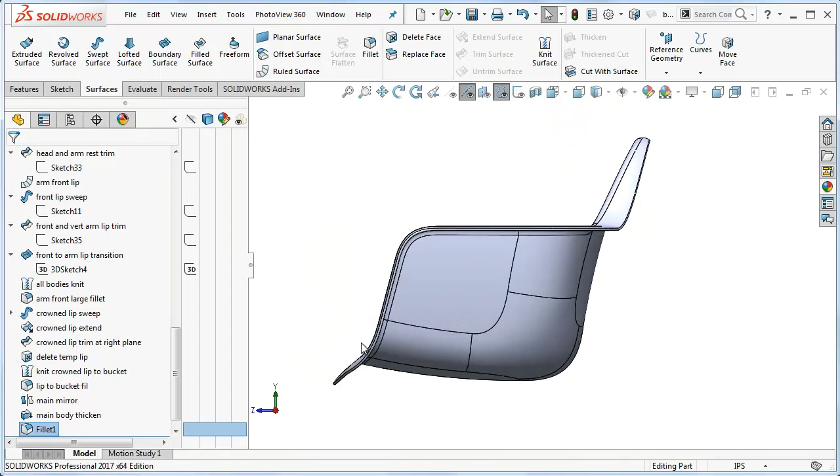There's our chair, which looks pretty much like the real thing, although again my dimensions are completely made up, so the proportions are probably off a little bit. Here we see how this lip kind of angles forward just at the bottom and can be seen more edge-on in this area here, and is more edge-on in this area here.

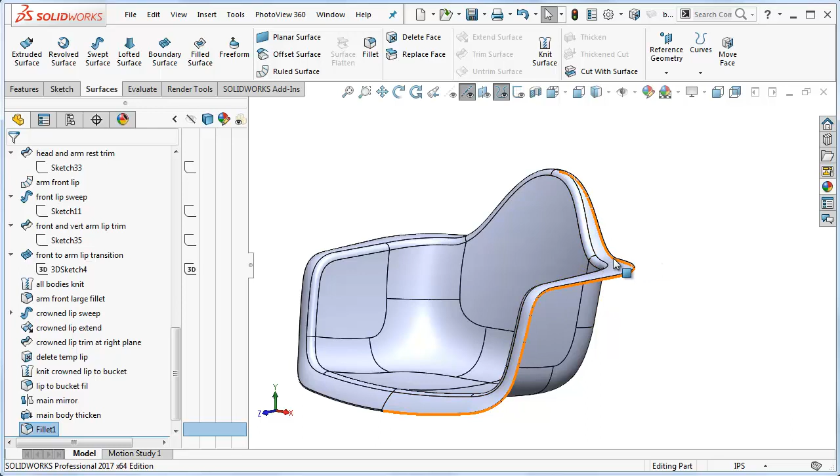Some of you might be building a chair that has a lip like this, but the lip is angled up more like this. In that case, it's probably best to just take an angled line and try to sweep it down, and then later on blend it in with whatever the shape is of the lip in these areas here. So that's the procedure, and I think you can use this basic approach to do several different chairs.